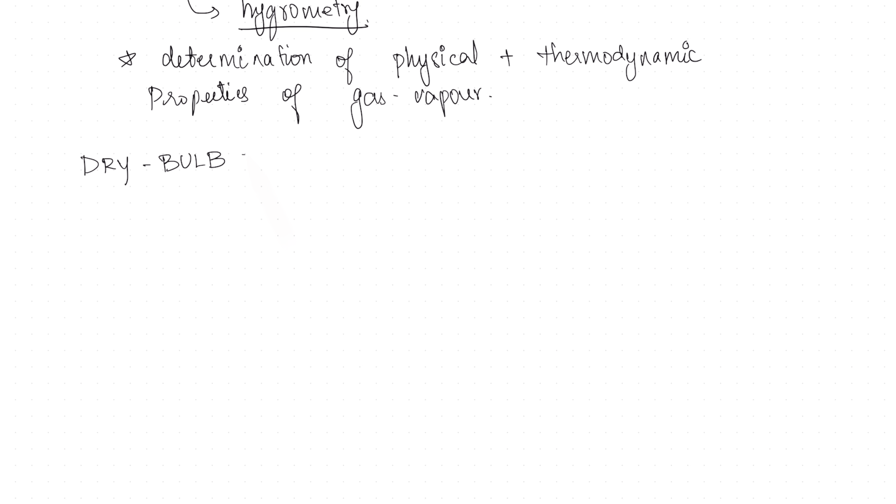Let's start with the terms usually dealt with in hygrometry. The first term is dry bulb temperature. So dry bulb temperature, or just temperature, or air temperature, it all refers to dry bulb temperature. Even if they say just temperature or air temperature, it all means dry bulb temperature.

This is the temperature of air measured in a place that is shielded from direct solar radiation. So no other fancy definitions attached to it. It's as simple as your air temperature.

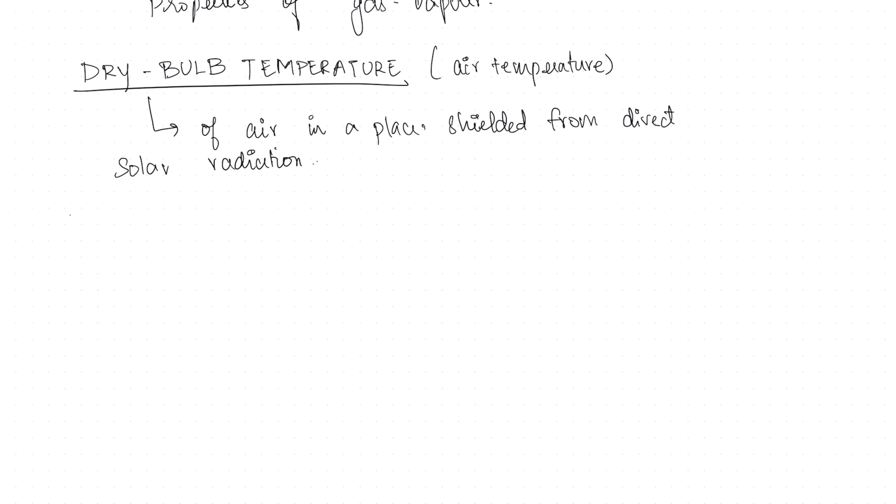Now let's move on to wet bulb temperature. Your wet bulb temperature basically indicates the cooling effect due to evaporation. Now what does that mean? Let me explain. How it is usually measured is, this is your thermometer and the bulb of it is usually covered with a wet cloth or a wick.

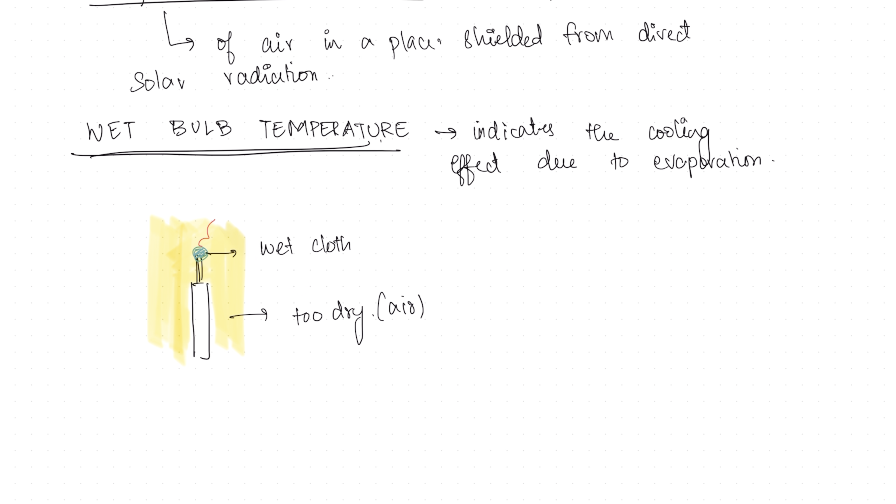Now imagine the air around it. The air around it is too dry. So what does it do if it's too dry? It takes up the water vapor from this wet cloth by evaporation and takes it into the air. So what will happen? The temperature here would become lesser.

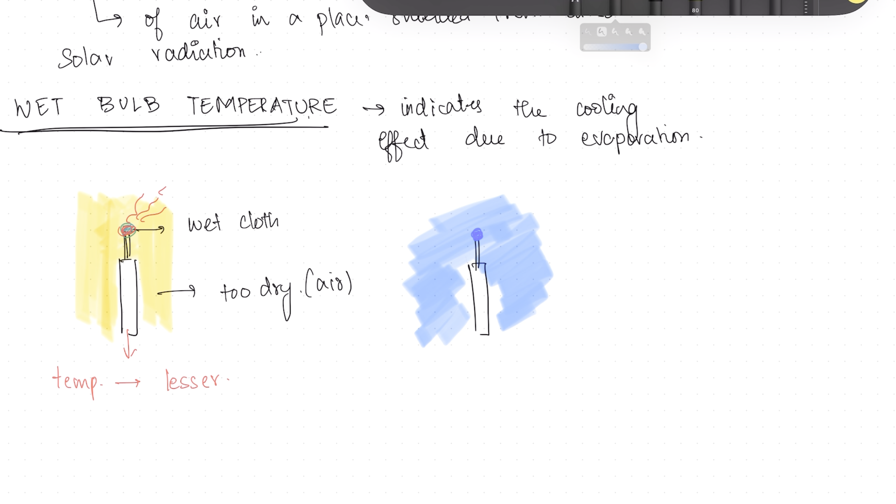Now imagine the same scenario, your thermometer covered with wet wick, but here the air is too humid, which means it has enough moisture content. So it has some amount of moisture in it. So what does it do? It takes very little amount of water from the cloth by evaporation. So here the temperature would be comparatively higher.

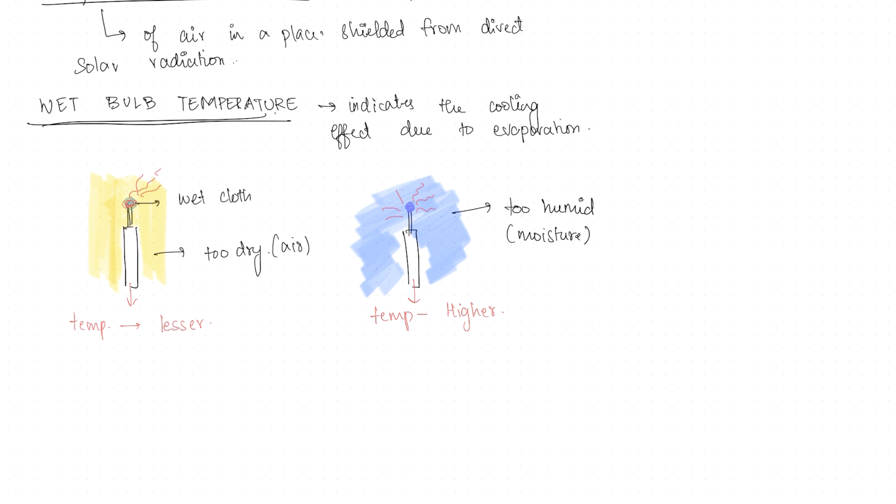Now imagine, no, before that - whatever temperature, higher or lower, I'm talking about, would always be lesser than the dry bulb temperature. So your wet bulb temperature would always be less than your dry bulb temperature. So let's consider what this means.

Imagine the air temperature, or your dry bulb temperature, to be 30 degrees Celsius in both accounts. And since the air is too dry, it takes up a lot of water. Then the temperature you would find is, let's say, 25 degrees Celsius.

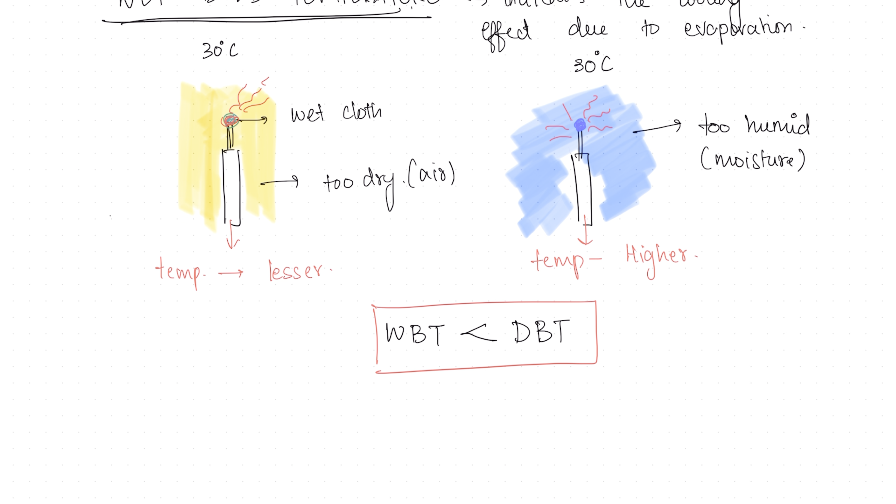And since there is already some amount of moisture in the air because it's already humid, it takes very little amount of water due to evaporation. So the temperature is comparatively higher - let's say here it is 28 degrees Celsius. Any which way, the temperature is less than dry bulb temperature. But if you compare both, this would be higher compared to your dry air. So that is what I am talking about.

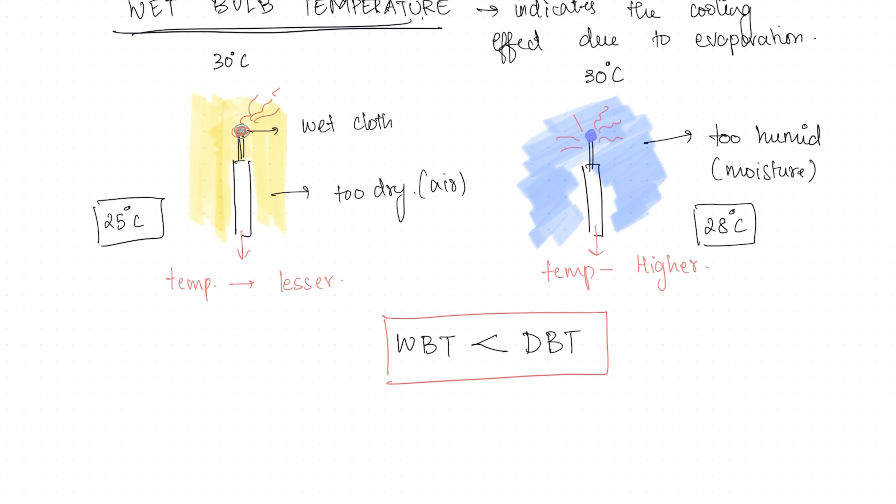Now imagine a third case scenario where the air here is 100% saturated, which means it does not have any space to take up any more water vapor. In that scenario, your wet bulb temperature would be equal to your dry bulb temperature. Okay, I hope this is clear.

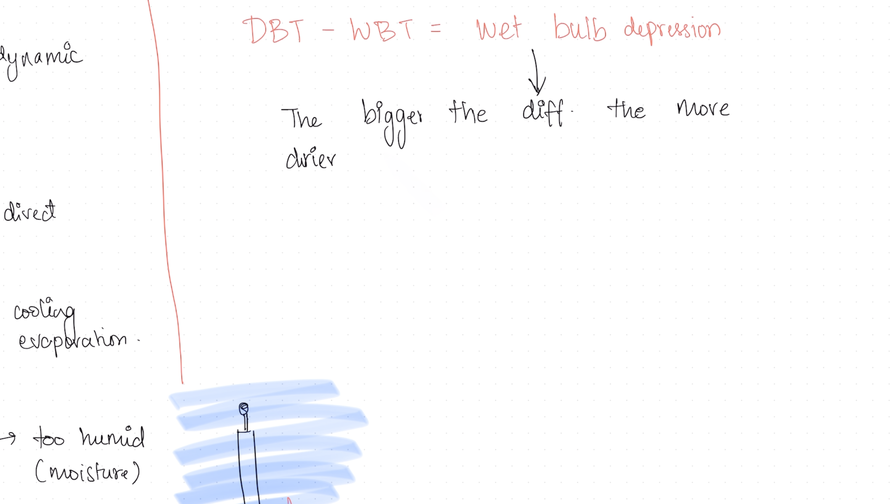Let's move on to the next parameters. Now, your dry bulb temperature minus your wet bulb temperature gives something called the wet bulb depression. And the bigger the difference, the more dry the air; the smaller the difference, the more humid the air.

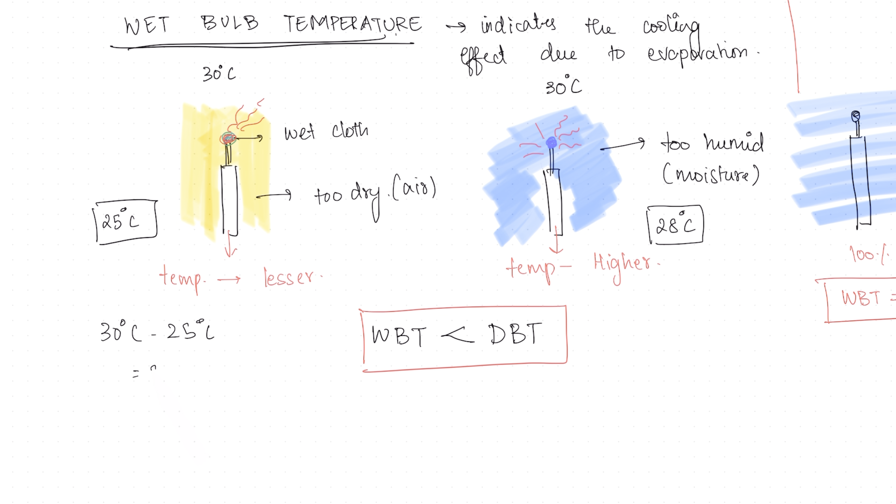Now what does this mean? Let's again go back to the same example. Here, the dry bulb temperature is 30 degrees Celsius, your wet bulb temperature is 25 degrees Celsius, so your wet bulb depression would be 5 degrees Celsius. And here it would be 30 minus 28, which is 2 degrees Celsius. So the more dry the air, the bigger the difference; the more humid the air, the lesser the difference. So I hope it's clear.

Now let's move on to dew point temperature.

Dew point temperature is basically the temperature at which the air or water vapor condenses into dew. This is the temperature at which water vapor turns into dew, and this is the process of condensation, which is basically the process by which we get rainfall. Your dew point temperature is always less than your wet bulb temperature, which is always less than your dry bulb temperature.

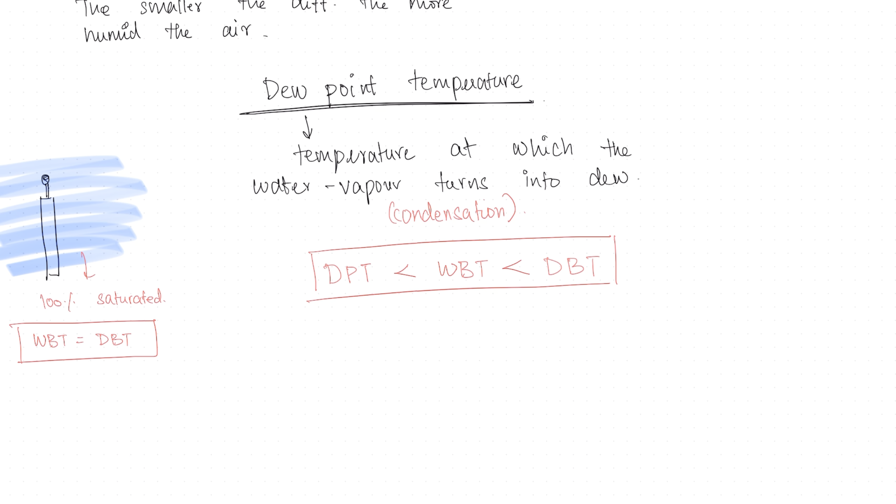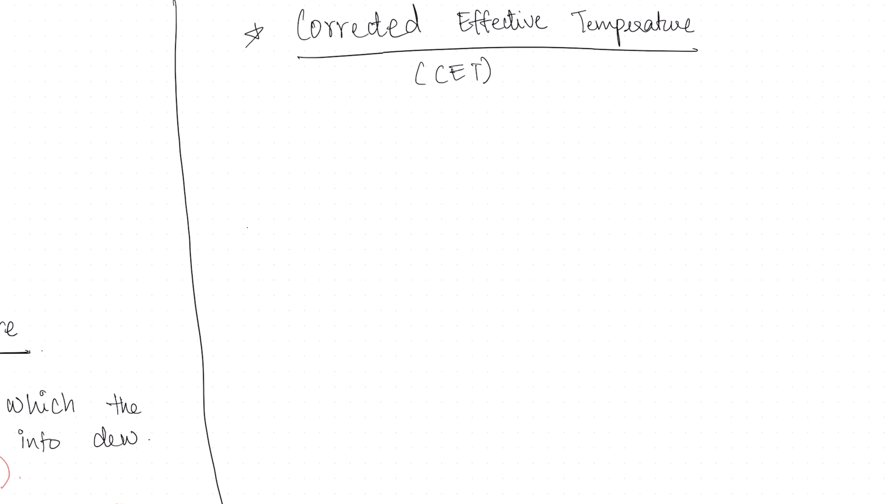Now let's move on to another parameter, which is corrected effective temperature, or CET. What does this mean? I'll start with a demonstration. Imagine this is a room and you're standing in it. The general air here is your air temperature, which is your dry bulb temperature.

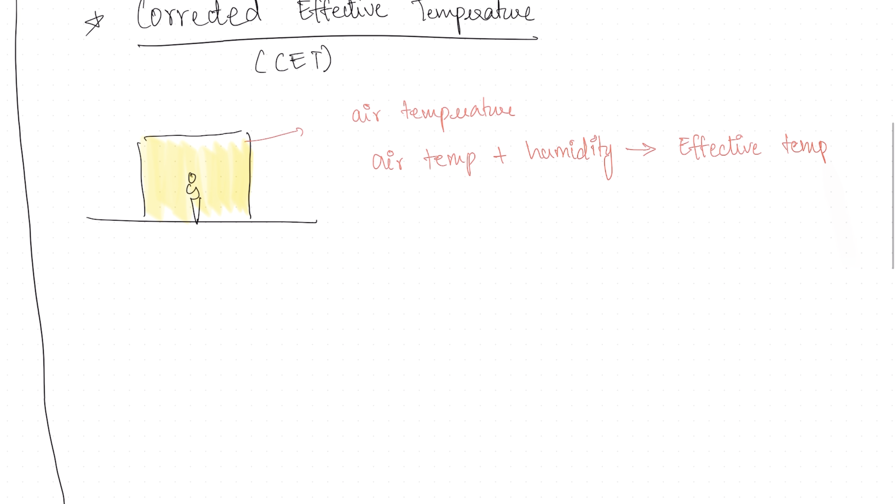Now imagine the air is humid. So your air temperature plus it's humid, the air has humidity. When you add these two, you get something called the effective temperature. What does that mean? Imagine you measure the air temperature in the room and it feels like 30 degrees Celsius. But then the air is very humid, and you add humidity to it. It doesn't feel like 30 degrees Celsius anymore, it feels a bit more than that - let's say it feels like 32 degrees Celsius. These are just examples I'm using, keep that in mind.

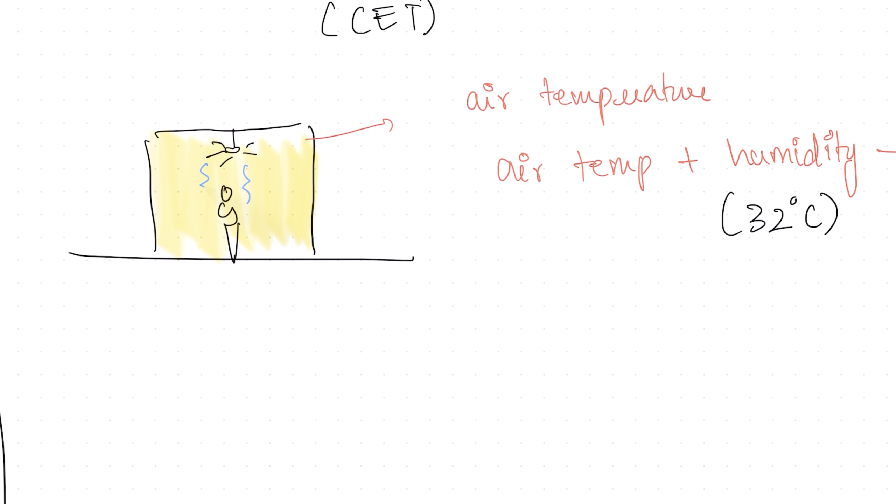Now imagine you are adding a fan to it, which means you're giving air movement. All this air is coming over you and you feel okay. With the inclusion of air movement, you feel okay at maybe 30 degrees Celsius, or let's even say 28 degrees Celsius. Now imagine all the walls around it are hot, or give off radiation from heat - this gives you radiation heat from your surroundings. With all that, the temperature that you feel is at 29 degrees Celsius.

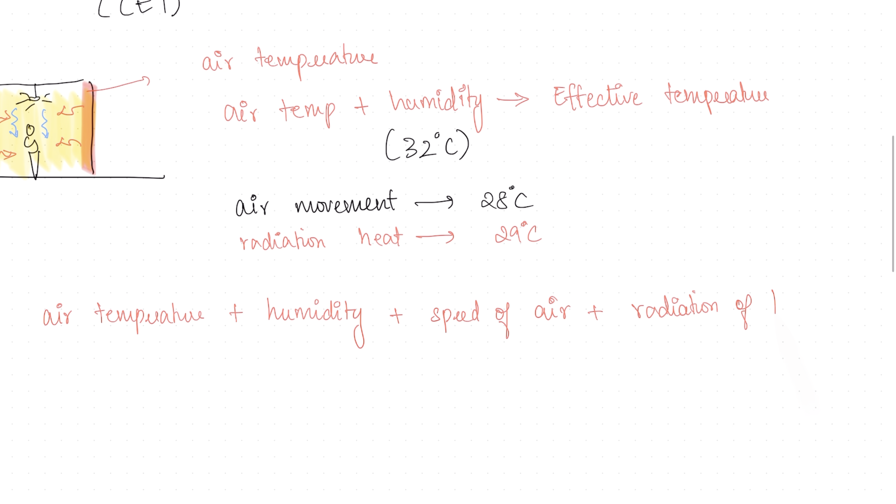So corrected effective temperature is the temperature that includes your air temperature, your humidity, your speed of air, and your radiation heat. All these parameters combined give you corrected effective temperature.

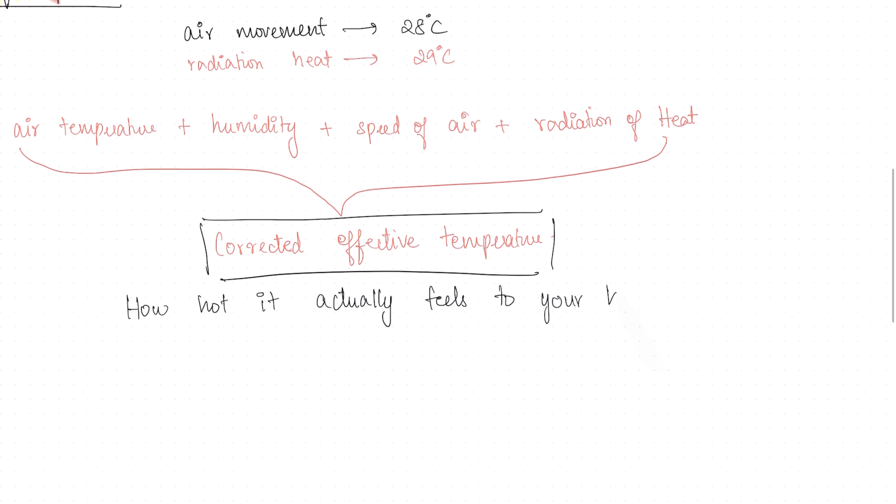What does this mean? This basically means how hot it actually feels to your body in real space. The parameters that it considers for this corrected effective temperature are air temperature, humidity, speed of air, and radiation heat.

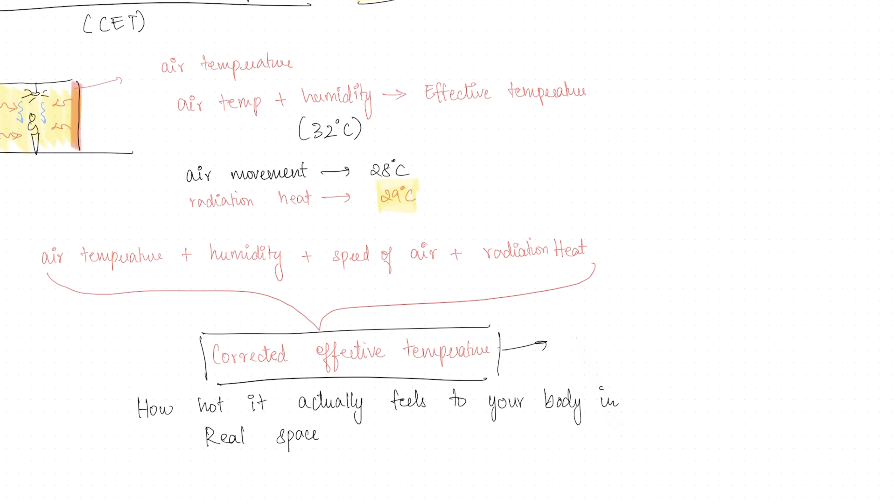Now again, let's look at this. Here we considered our air temperature to be 30 degrees Celsius, but by taking into account all these factors, you feel like it's 29 degrees Celsius, which means your corrected effective temperature is 29 degrees Celsius. I hope this is clear.

So let's move on to humidity. Humidity is the moisture content in your air, and there are different categories under it. Let's look into each one by one. Imagine there's a box, and this box is filled with air. What is air made of? Air is made up of your dry air plus water vapor, and this gives you your moist air.

The amount of water vapor present compared to the amount of volume of air is your absolute humidity. Absolute humidity is the amount of water vapor in the box to the volume of air in it. That is your absolute humidity. It can be defined as absolute humidity equals mass of water vapor to the volume of air. Absolute humidity is also called water vapor density.

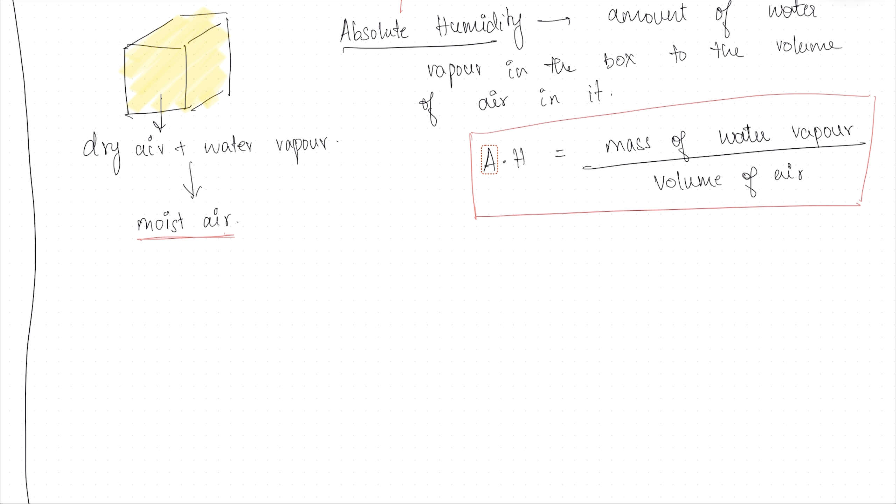Now let's talk about moist air. In this moist air, how much water vapor is present? The moist air consists of your dry air and your water vapor. So what amount of water vapor is present in a moist air? That gives you your specific humidity - basically how much water vapor is present in the moist air. And the formula is mass of water vapor by mass of moist air gives you your specific humidity.

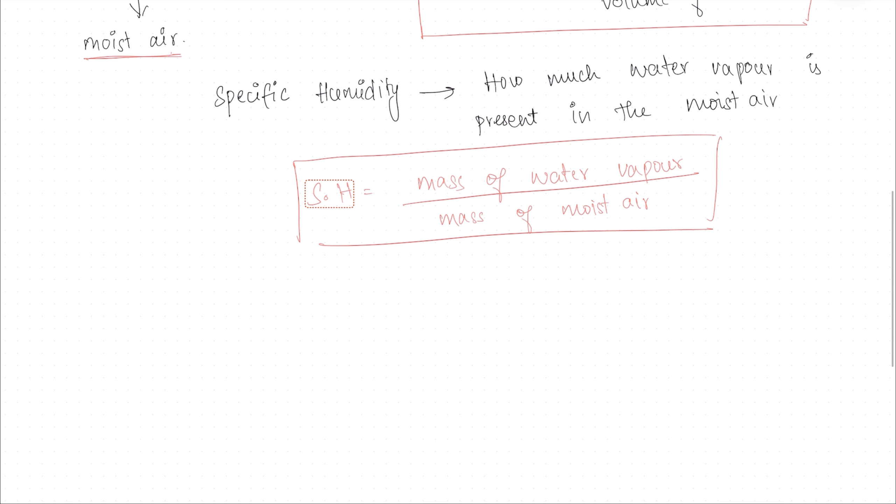And if you compare the water vapor to the dry air, that gives you your humidity ratio. So humidity ratio is, if you compare the water vapor to the amount of dry air.

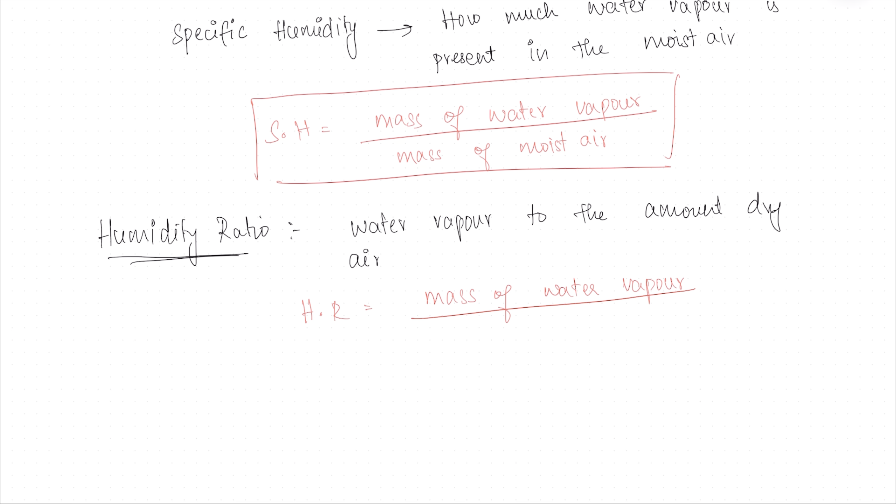Humidity ratio is equal to... okay, I hope it's clear up to now.

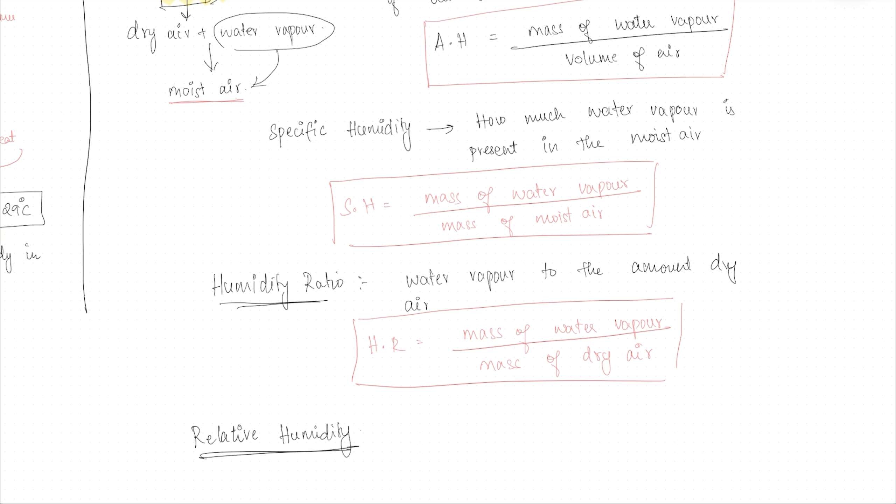Then there is the term relative humidity. So what does this mean? This means the amount of water vapor present in the moist air to the maximum amount of water vapor the air can hold. So it's a ratio, the ratio of amount of water vapor present in the air to the maximum amount of water vapor the air can hold, and it's expressed in percentage. This maximum amount of water vapor is basically your saturation point.

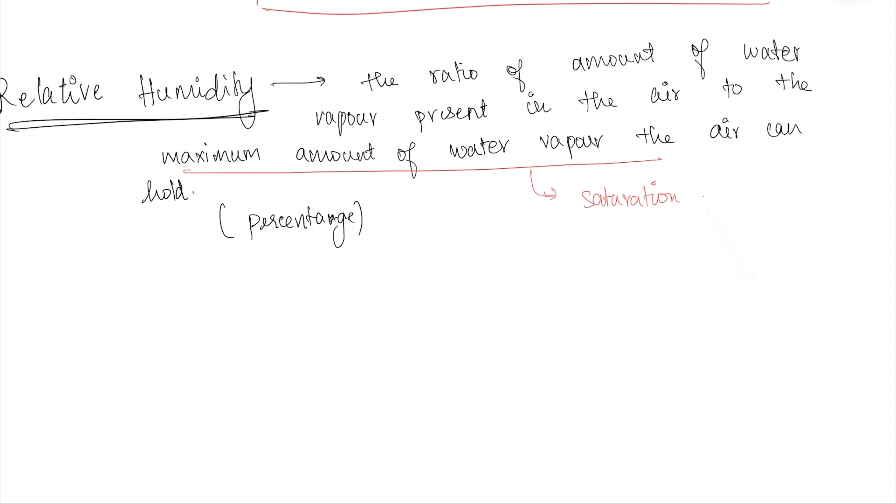So relative humidity is actual vapor pressure to saturation vapor pressure into 100.

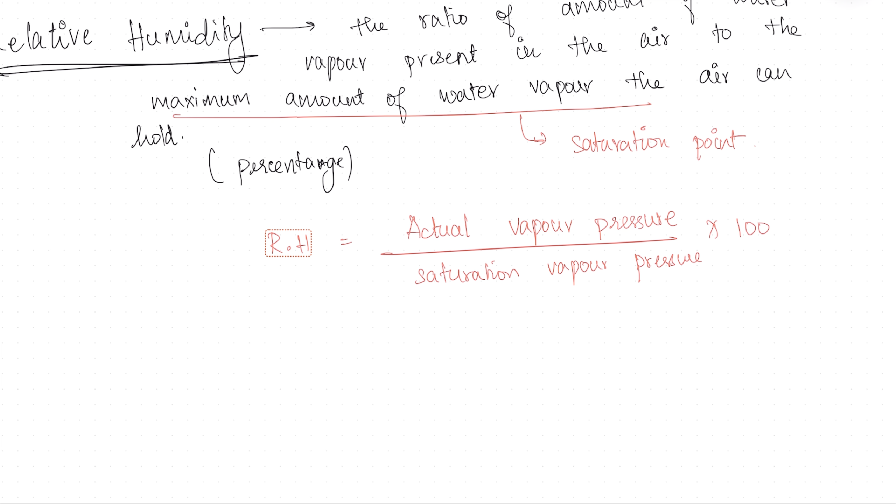So let's talk about humidity once more and try to understand it. Absolute humidity: imagine there's a box and it has air in it. The air is a combination of your dry air and your water vapor, which gives you the moist air. So the amount of water vapor to the volume of air present inside that box gives you the absolute humidity. So absolute humidity is equal to mass of water vapor by volume of air.

Now the amount of water vapor present in the moist air gives you specific humidity. So how much water is present in the moist air, which means mass of water vapor by mass of moist air. Humidity ratio is the amount of water vapor present in the dry air, so mass of water vapor by mass of dry air.

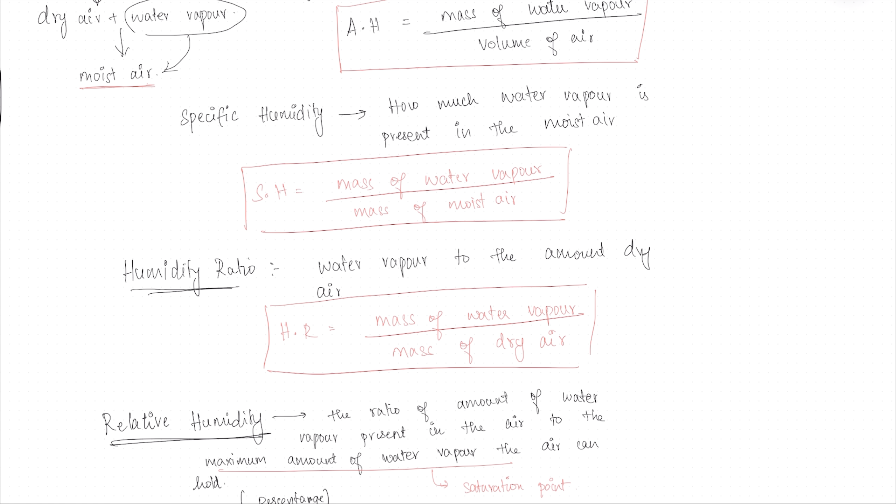Then relative humidity is the ratio of amount of water vapor present in the air to the maximum amount it can hold. So actual vapor pressure by saturation vapor pressure into 100, this 100 because it's expressed in percentage. So I hope humidity is clear now. And if you are getting confused between absolute humidity and specific humidity, thinking like volume of air and mass of moist air is the same, then no, volume is different from mass.

Now let's move on to our next terms, which is specific enthalpy and specific volume.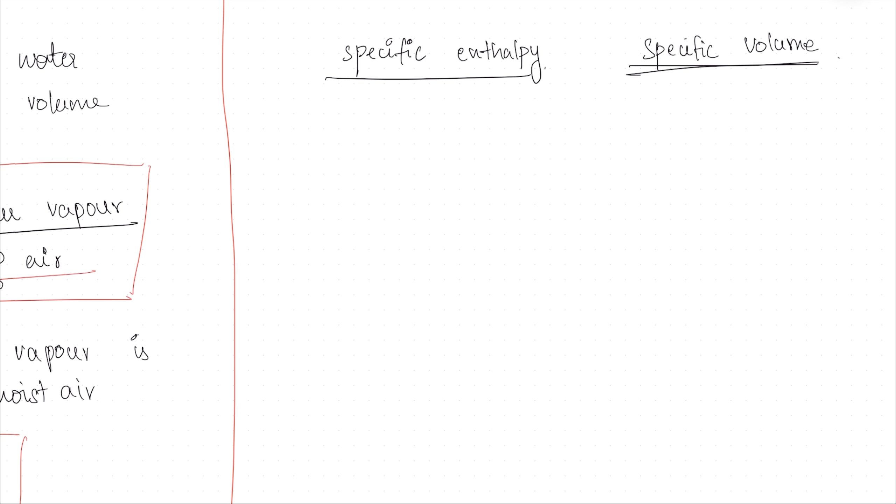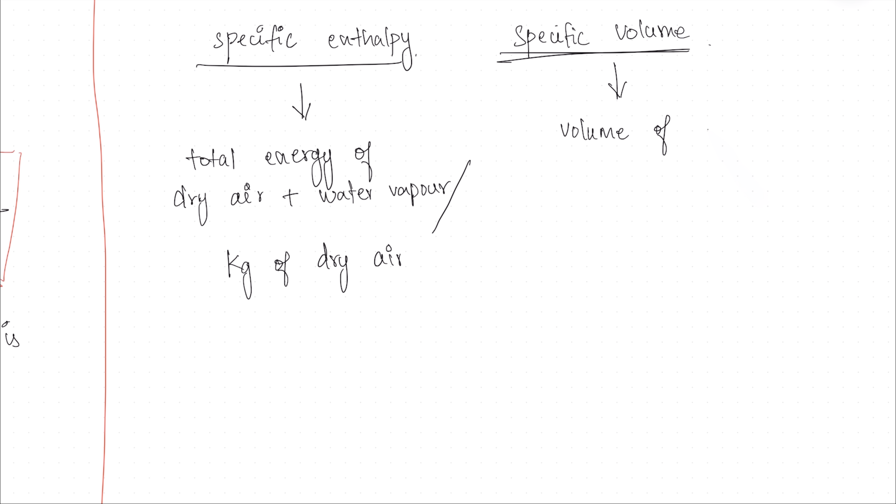So specific enthalpy is the total energy of both the dry air plus water vapor per kilogram of dry air, and specific volume is the volume of both the dry air plus water vapor per kilogram of dry air.

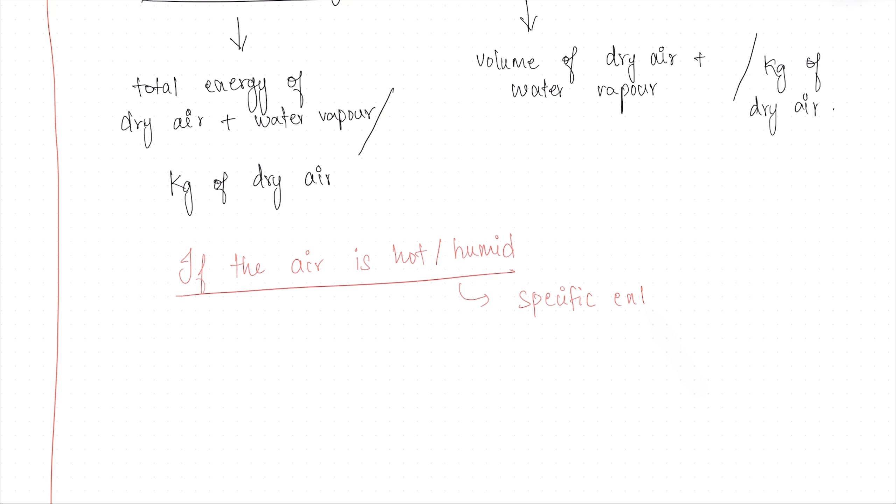And if the air is hot or humid, it expands and it requires a lot more energy. So both your specific enthalpy and your specific volume, they both increase.

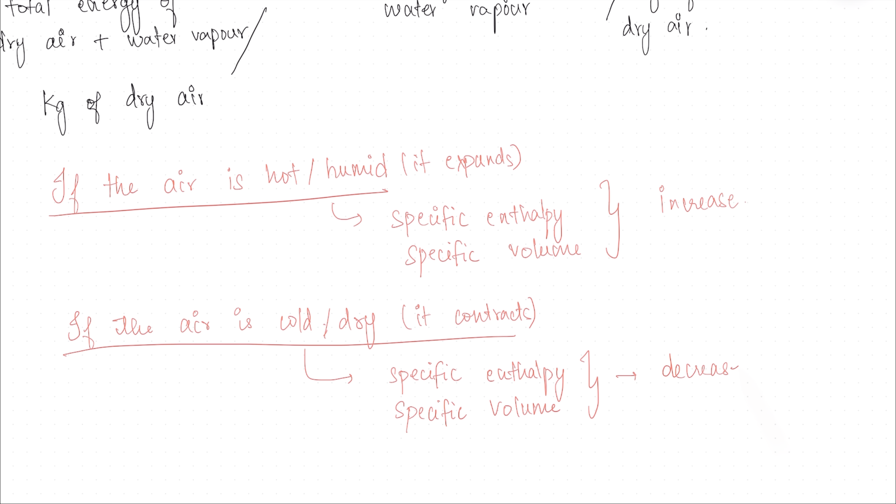Let's move on to the next topic, which is your psychrometric ratio. So the psychrometric ratio formula is R.

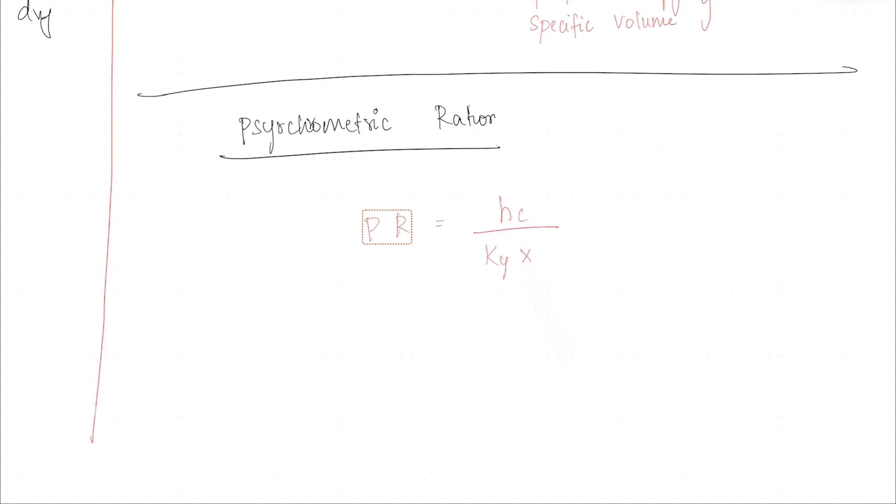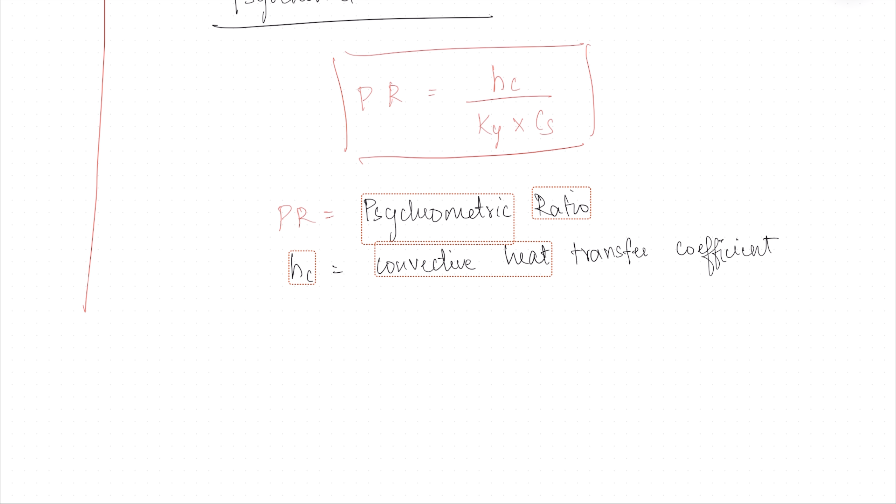Now let me explain each term. This is your psychrometric ratio. Hc is the convective heat transfer coefficient. So what is convective? Convective is a type of heat transmission. Convection basically is the transfer of heat through liquid forms like gases or water, like that.

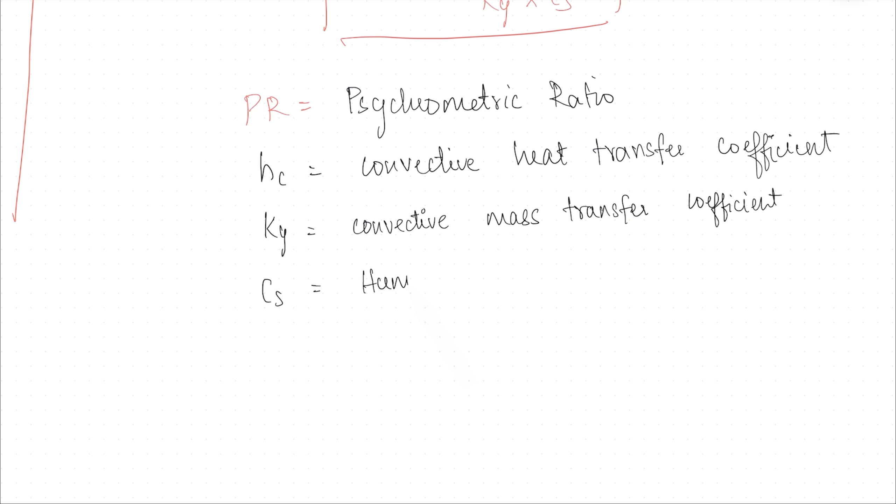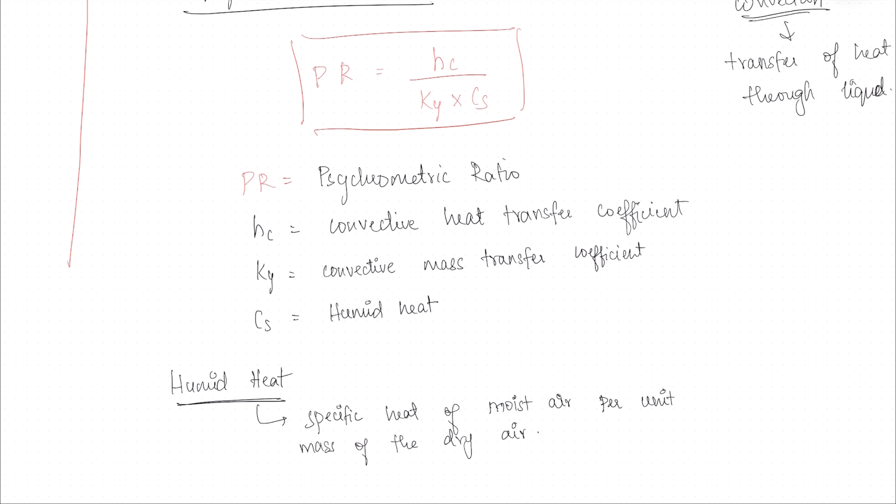Then Ky is your convective mass transfer coefficient, and Cs is your humid heat. So what is humid heat? Humid heat is the specific heat of moist air per unit mass of the dry air. So psychrometric ratio is the ratio of convective heat transfer to the product of convective mass transfer and humid heat. I hope this formula is clear.

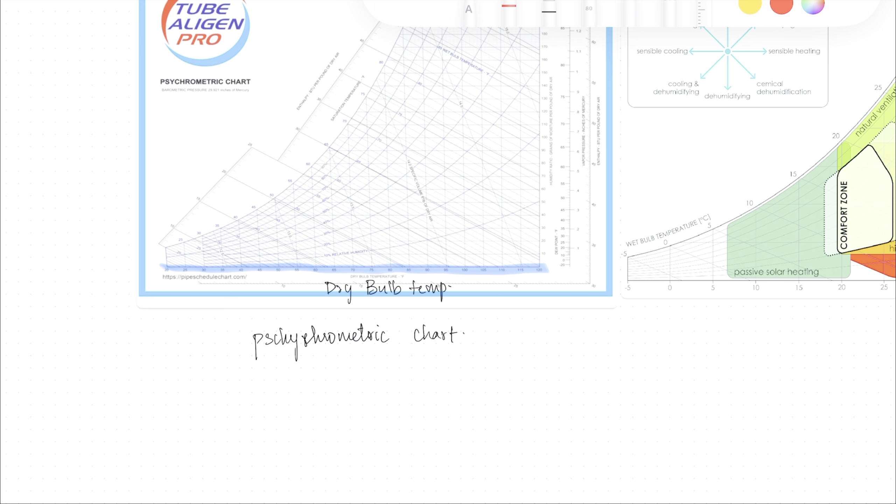And everything that's marked on this line is your wet bulb temperature or your saturation temperature. So these are your wet bulb - I meant all the marks here, okay? So the temperatures that are marked here.

And all these curves, these curves that go simultaneously, all these curves are your relative humidity.

And all the points that are marked here is your enthalpy.

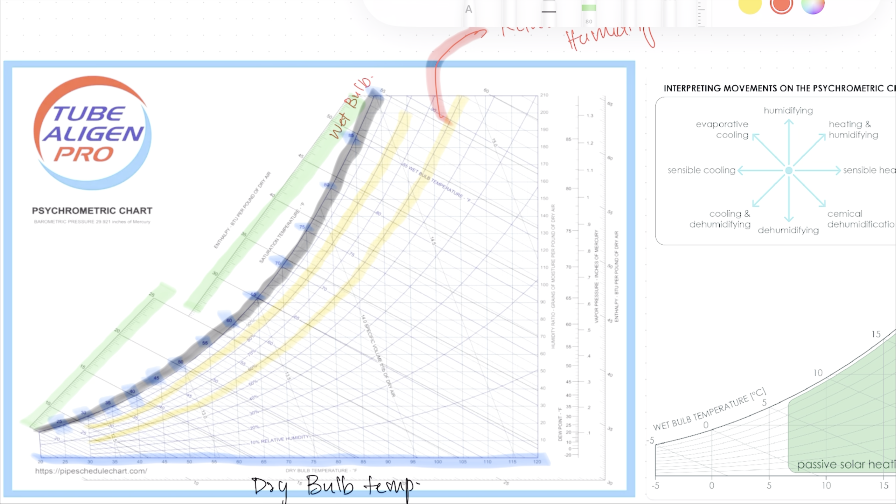And the almost vertical lines, these form your specific volume. These are your specific volume.

And that's mentioned here on the y-axis is your humidity ratio. So let me explain this again.

Let me draw here separately and I'll explain it. So, these two are your axis, okay?

And whatever that's mentioned here is your dry bulb temperature, DBT. It increases as it moves this way and decreases as it moves this way. So let's just say here 20, 30, 40, and so on, then 60, 70, 80 and so on.

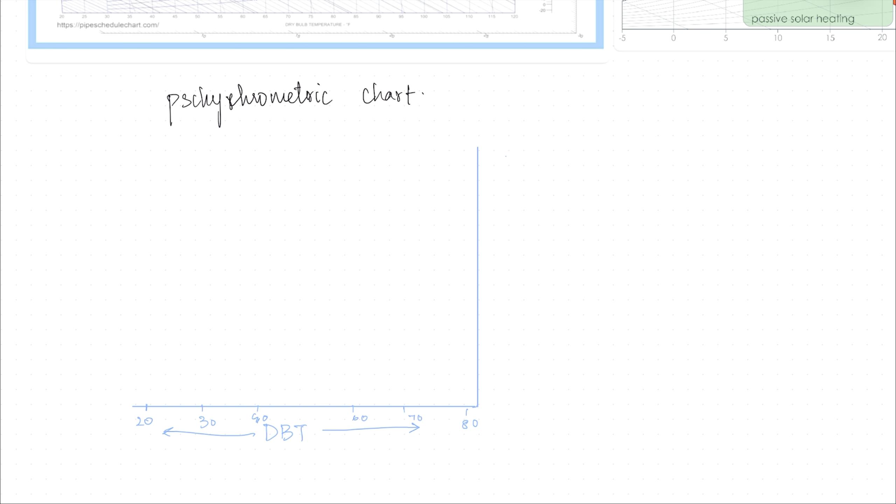And whatever is marked here is your humidity ratio, usually called grains. So it's marked here, say 0.01, 0.08, 0.07, and so on. It's the same - increases as it moves up, decreases as it moves down.

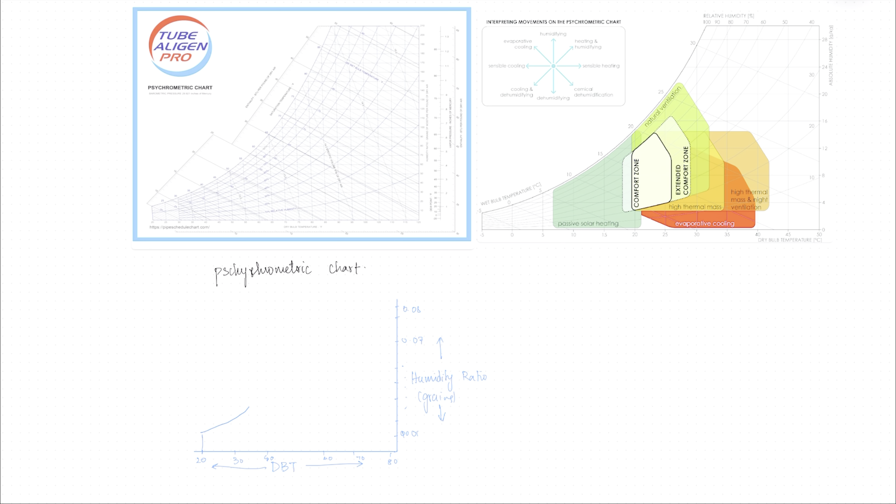Then you have this curve. Okay, this is your curve, and any point marked here - all these points are your wet bulb temperature. It's also called your saturation temperature - the curve itself is called the saturation temperature.

And your wet bulb temperature basically goes crossways, so it goes like this. These lines are your wet bulb temperature.

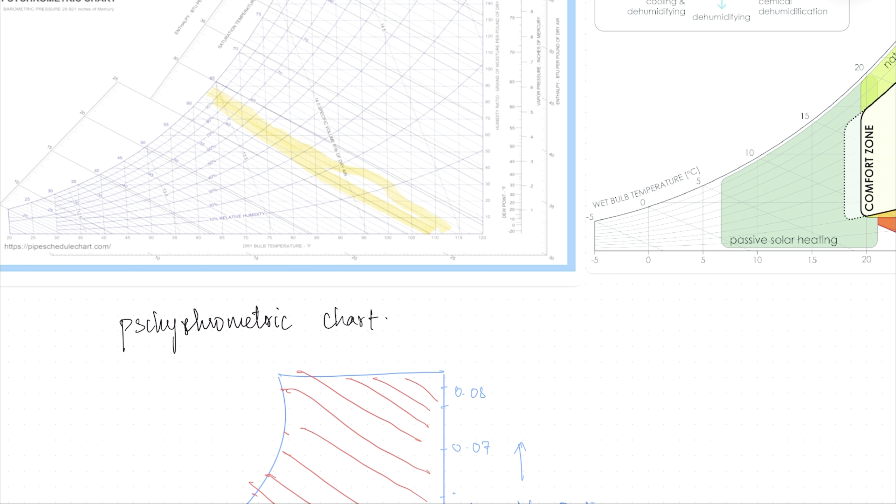Now, projecting from here are your enthalpy lines. So these are your enthalpy.

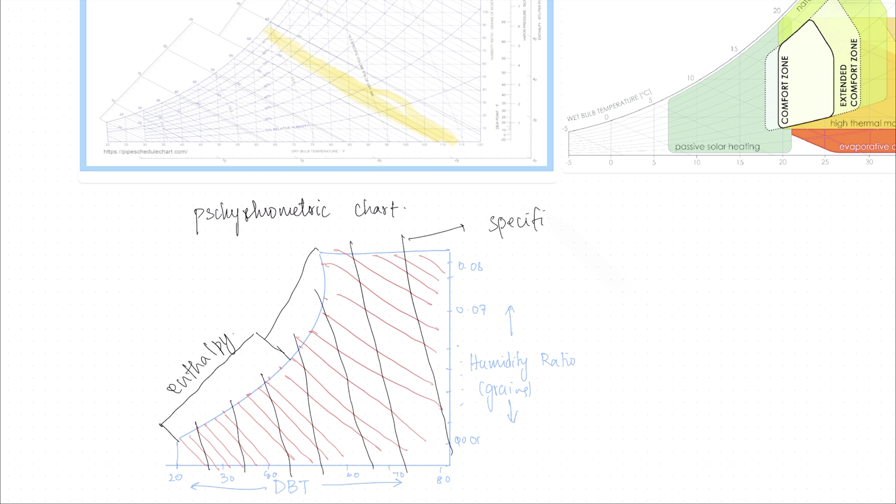And your almost vertical lines - not fully vertical, but almost vertical - that go this way, they are your specific volume. So again, let me mark them - these lines are your specific volume.

Now the dry bulb temperature is not just marked in this region - the line also goes up. So all the vertical lines that you see are your dry bulb temperature.

And the curves that go along these lines - these curves are your relative humidity. Okay, let's mark again: these curves are your relative humidity.

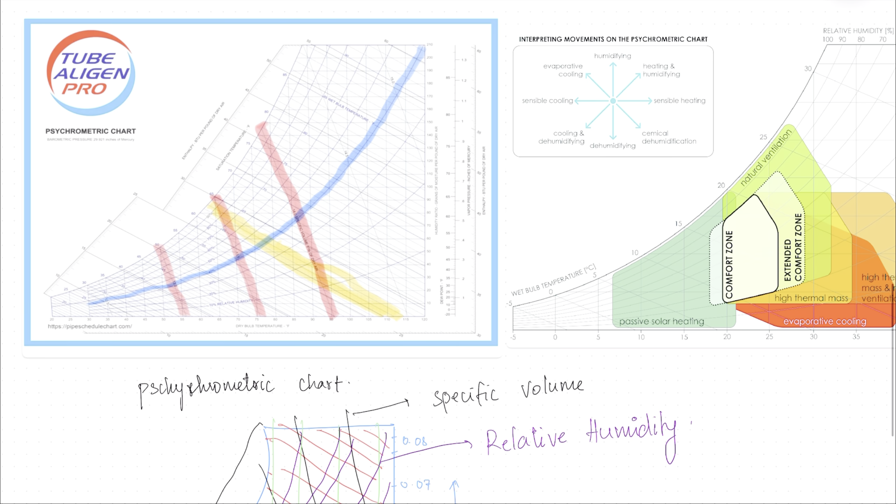And the line that goes from the humidity ratio and intersects the wet bulb temperature curve - the point that it makes, that point where it intersects, gives you your dew point temperature. Okay, so I hope this is clear.

So let's consider it now with an example. Let us consider a temperature of say 70 degrees Fahrenheit - this is the point, the line that goes here. And the wet bulb temperature is, let's say, 65 degrees. So these diagonal lines are your wet bulb temperature.

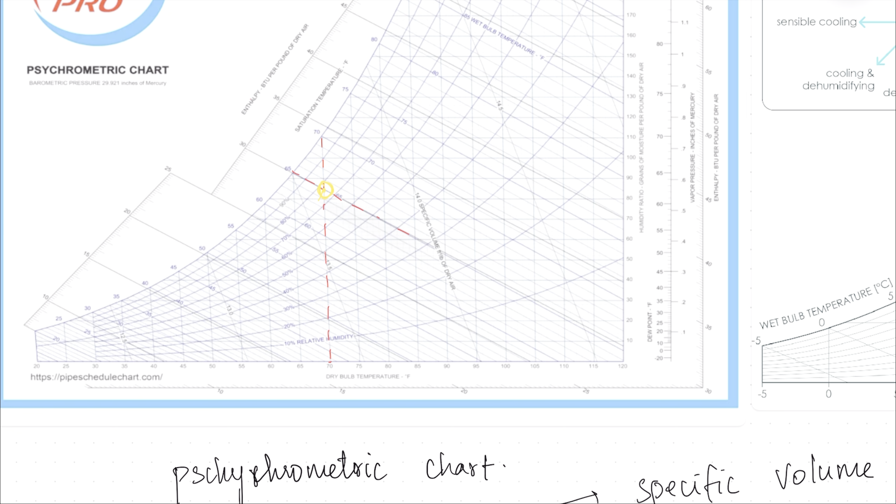Now the point that this intersects, and the curve that goes parallel to the relative humidity curves, gives you - with the dry bulb temperature and the wet bulb temperature, you can find the relative humidity. This is not very visible, but okay, that's relative humidity.

Now what do you do? You take this point - the point of intersection of the dry bulb temperature and wet bulb temperature, which gives you your relative humidity - and you join it with the humidity ratio, then extend it, which gives you this intersection point. Now this is between 60 and 65, leaning more towards the 60s range, so let's consider this 62 degrees Fahrenheit. So this is your dew point temperature.

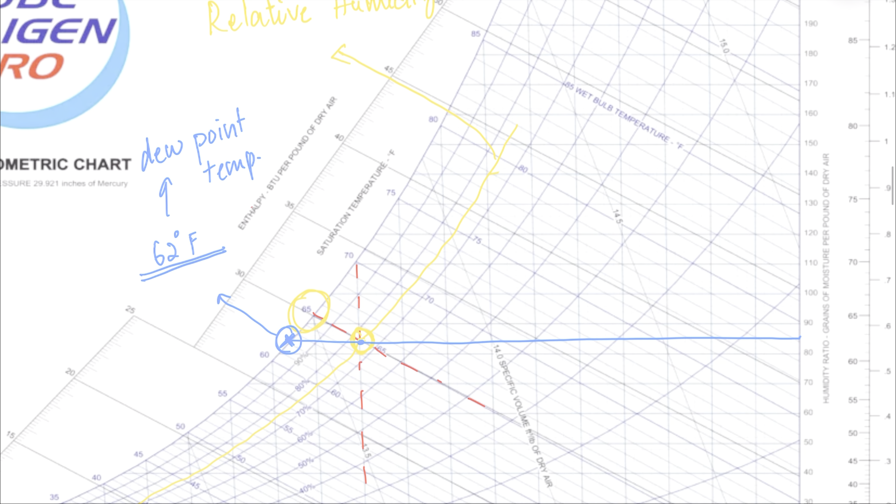So I hope this is clear, and let's move on to the strategies that can be done using the psychrometric chart. So these are the psychrometric chart strategies - it's mostly self-explanatory, but let me talk about it.

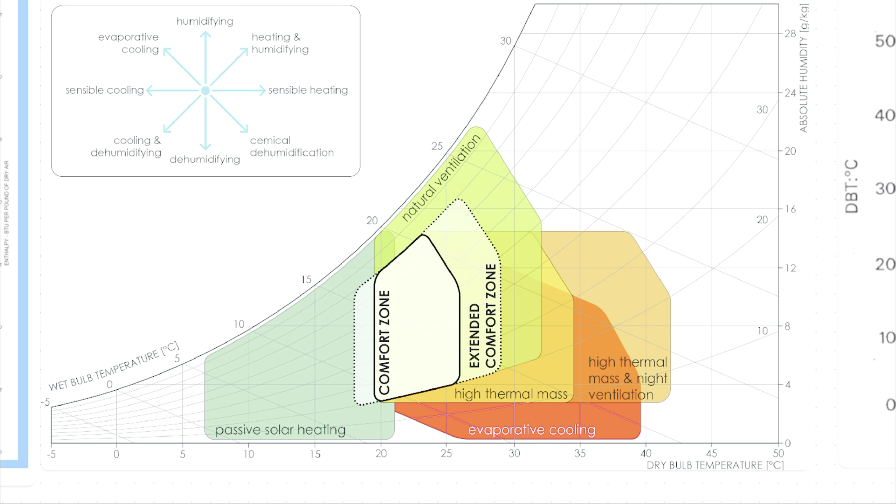So the way we plot our dry bulb temperature and find all the related issues that I talked about in this map - after plotting it, you can divide it into zones. Whatever falls within this zone is your comfort zone, and these are your extended comfort zone. So up to these regions we have no issues, it's all good, it's all fine.

Once it stretches into these regions, then we need to think about giving a lot of natural ventilation. Then if it reaches these regions, a lot of passive solar heating is required - just look at the temperature here, it's only 10 degrees Celsius, so you would need a lot of heating to feel comfortable in that environment.

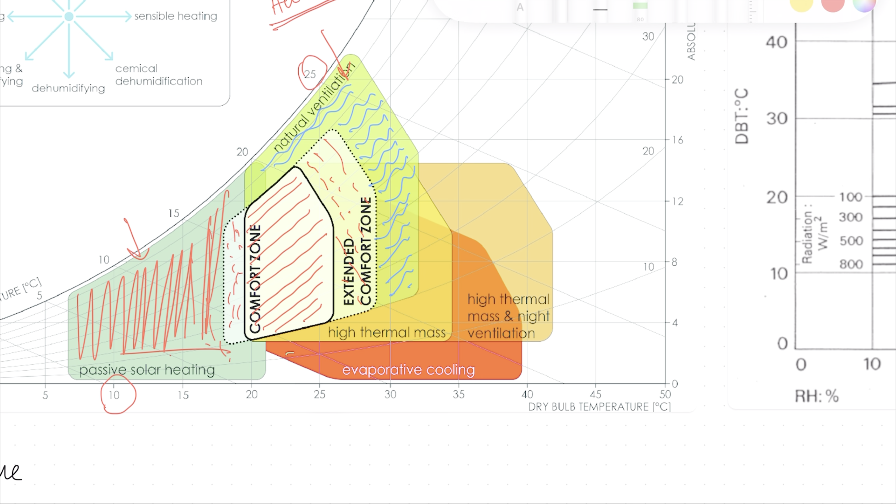So these are based on what kind of strategies need to be done - here you need a lot of passive solar heating. This temperature, like 25 degrees Celsius, isn't too bad, it's fine, but maybe the humidity is more, so you need to give a lot of natural ventilation. Then, in these regions, a lot of evaporative cooling needs to take place.

Then you have regions where a lot of high thermal mass materials, like thick walls, and other passive design strategies need to be used. In these regions, not just high thermal mass but also night ventilation needs to be taken care of. So these are the ventilation and design strategies that can be done using the psychrometric chart.

So I hope the psychrometric chart is clear now, and let's move on to other topics.

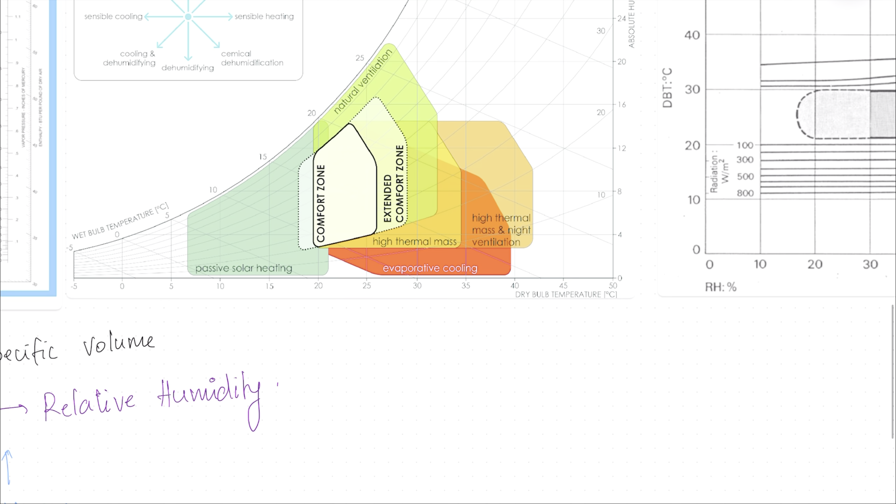So we have something called comfort ventilation, which is basically the ventilation that is comfortable enough for you in an environment.

So sometimes a building—let's say this is your building, and this is your direction of wind—the building need not always be 90 degrees perpendicular to the direction of wind. It can be, but it is not necessary. A convenient angle can be anywhere between 0 to 30 degrees.

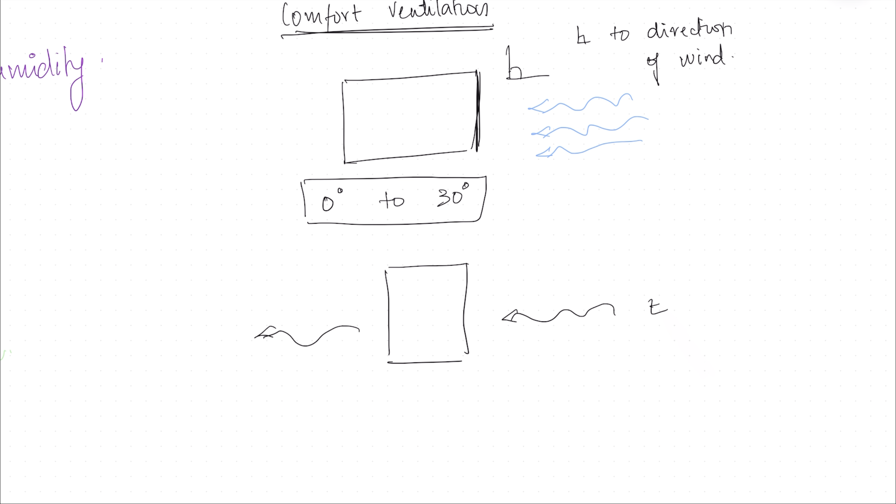For example, let us say this is your building and your wind direction is east to west. East to west is not the ideal orientation due to radiation and heat gain. So what you can do is orient your building at say 30 degrees, and you can still get a good amount of ventilation.

Okay, I hope this is clear. Now let's move on to the next point. For proper ventilation, the ratio of opening area to the total floor area of the room should be 1:6. This is the ideal ratio that is followed.

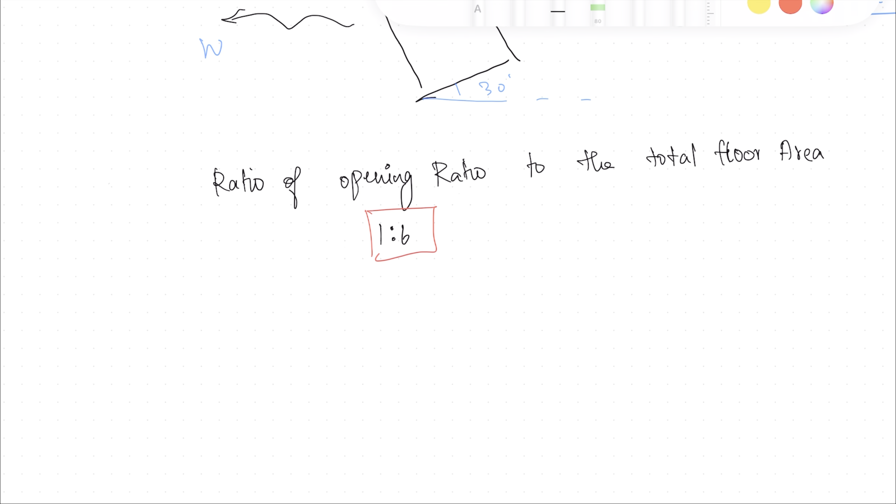Now let us look into terms with formulas, like air changes per hour. What does this mean? This means the number of times the air in your room, say, is changed completely in 1 hour. So that's what air changes per hour means, and you have formulas for this.

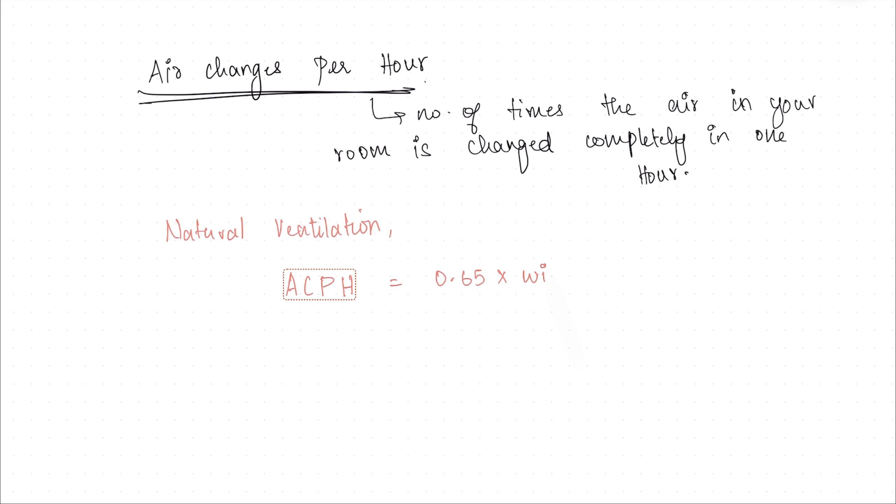If we take natural ventilation, then the air changes per hour is equal to 0.65 into wind speed into area of the smallest opening into 3600, divided by volume of the room. Okay, this is for natural ventilation.

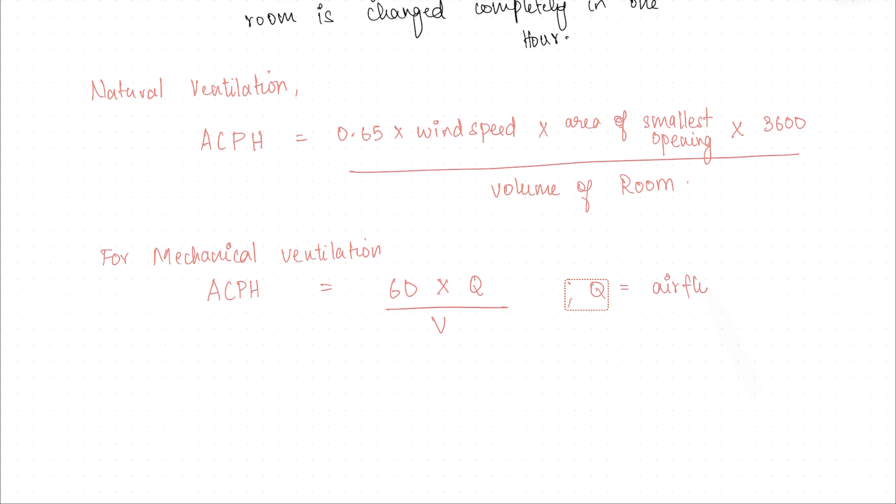And if you see for mechanical ventilation, it is equal to 60 into Q by V, where Q is your airflow rate. Okay, so these are the two formulas for air changes per hour.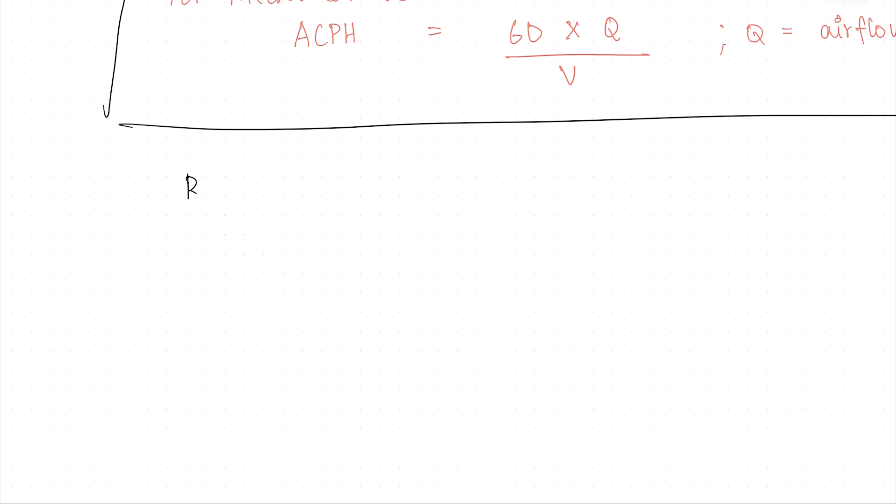Now the rate of air change depends on certain factors. Let's see what all those are.

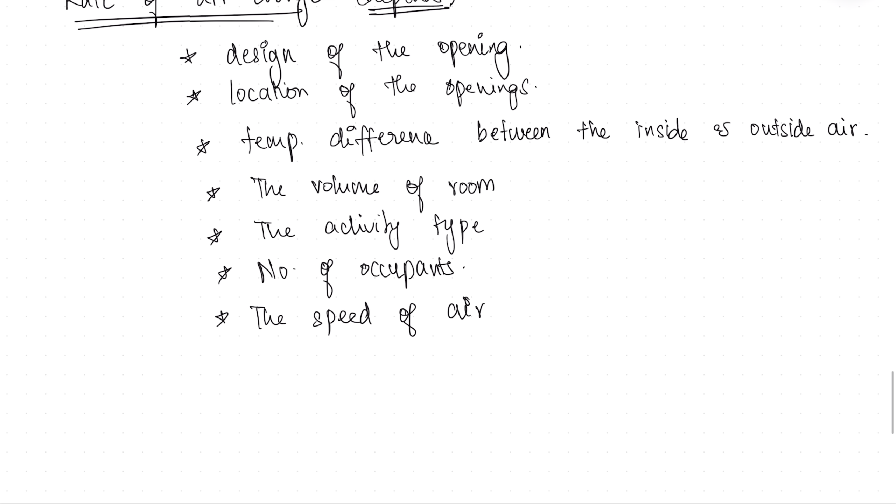So first is the design of the opening, the location of the opening, the temperature difference between the inside and outside air, the volume of the room, the type of activity that takes place in the room, the number of occupants within that room, the speed of air, and also the quantity of heat, moisture, and odor present in the room.

These are very practical things that we already know about, so there is no need for much explanation here. So what are the factors that the rate of change of air depends upon? It depends upon the design of the opening, location of the opening, the temperature difference between the inside and outside air, the volume of the room, the kind of activity that takes place in the room, the number of occupants, the speed of air moving into and out of the building, and the quantity of heat, moisture, and odor present in the room.

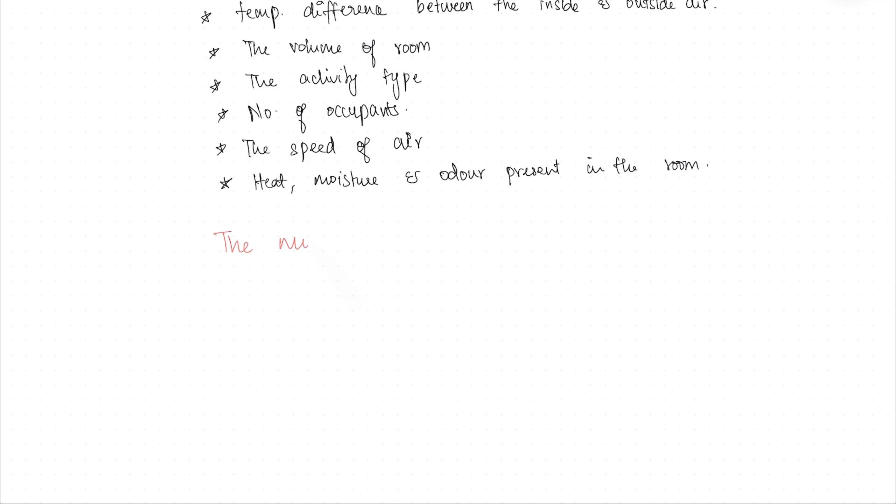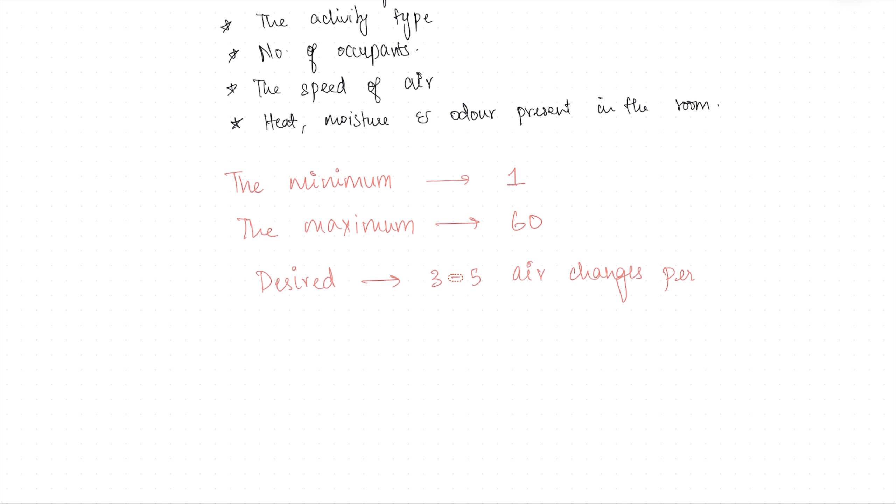Now, the maximum and minimum air changes that can happen: the minimum air changes per hour should be at least 1, and the maximum air changes per hour can be 60, but the desired range is basically somewhere 3 to 5 air changes per hour.

So we've talked about air changes, and now let's move on to heat gain or heat loss.

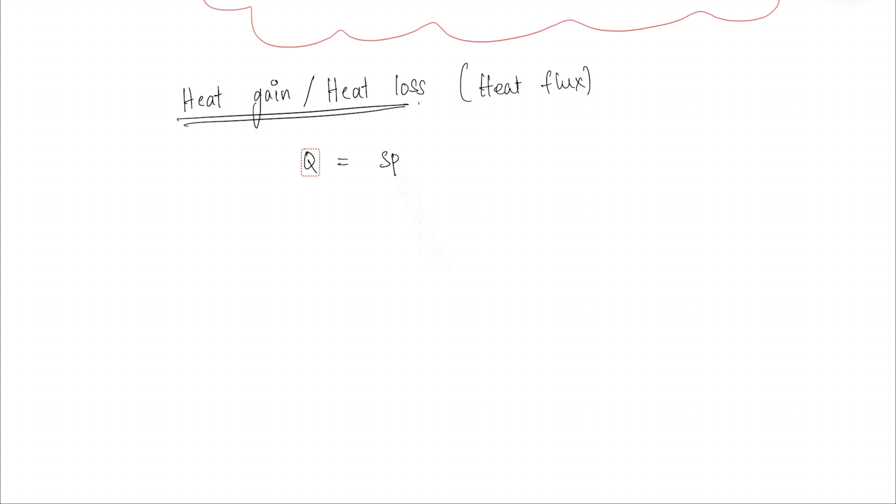I'm just going to talk about the formula here. So heat gain or heat loss, also called heat flux. The formula is Q equals specific volumetric heat of air into V into delta T. Now let's see what each of them is. Q is your heat flux.

Now let's talk about specific volumetric heat of air first. Specific volumetric heat of air is mostly 1300 joules per cubic meter degree Celsius.

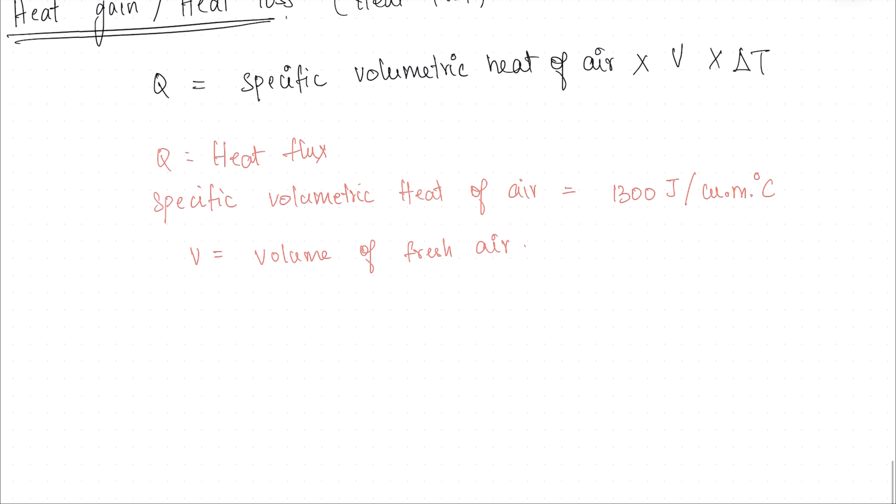And V is the total volume of fresh air. This total volume of fresh air can be found by number of air changes into volume of the room or space, divided by 3600, gives you your volume of fresh air. Volume of fresh air is not the same as volume of the room, so remember that. And delta T is the temperature difference.

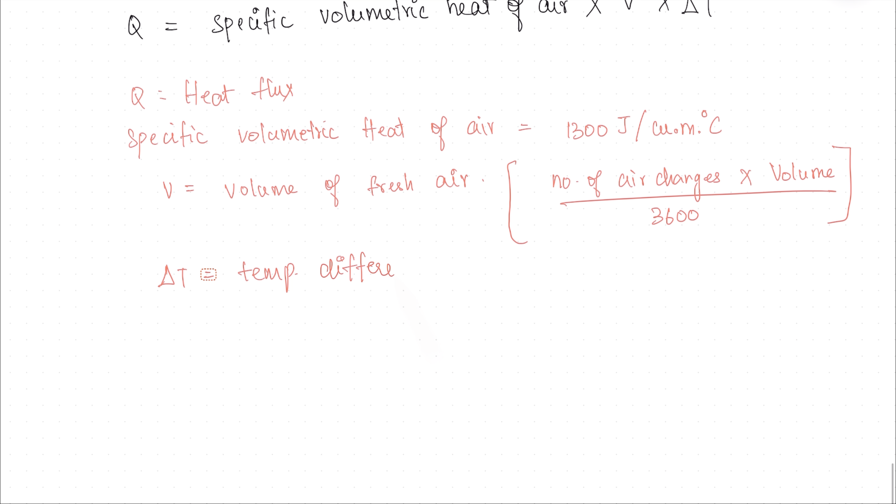So I hope the formula for heat gain or heat loss is clear.

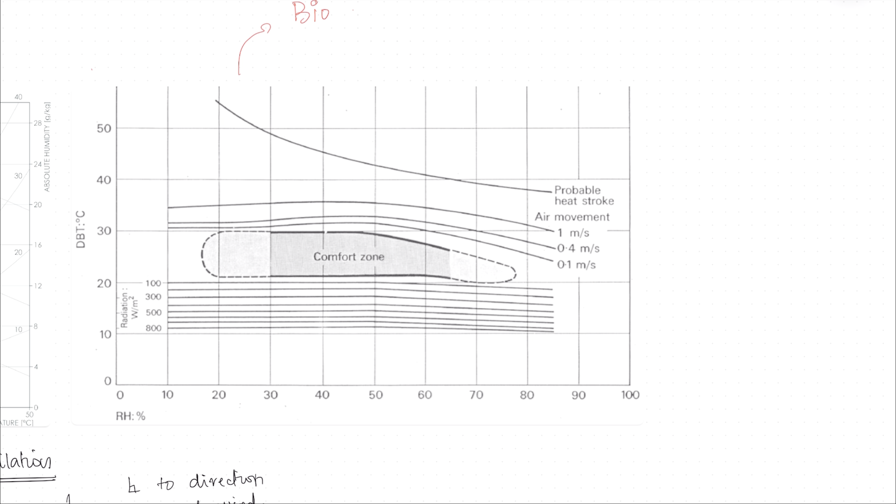Now let's talk about thermal comfort and the parameters that are used there. The first parameter I want to talk about is this bioclimatic chart, by Victor Olgyay. So Victor Olgyay is the one who founded or made the bioclimatic chart.

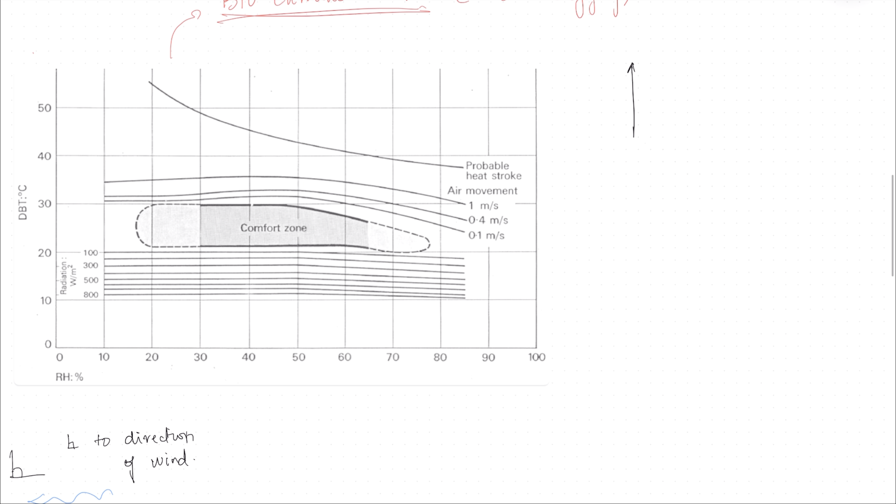Now let's talk about it a bit. The axes are basically: this is your dry bulb temperature and this is your relative humidity, as mentioned here. And this has a comfortable zone in it, so anything that falls into here is your comfortable zone. Anything that falls in the dotted region is acceptable, comfortable to an extent, like an extended comfortable zone, like how we saw in the psychrometric chart. It's the same way here.

And the regions here: anything that falls above the comfort zone but below this line, you need to see what kind of treatment needs to be done. So here a lot of wind is needed. But still you have to provide as much as possible so that anything comes into the comfortable zone. Even if you point your relative humidity along with your dry bulb temperature and it's somewhere here, you need to put an effort to bring it to the comfortable zone. It's the same way.

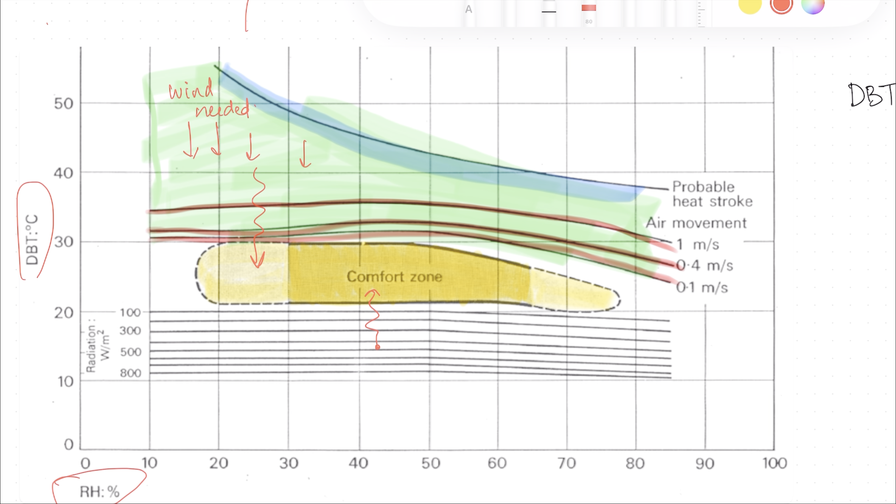Now see these lines. Can you see these lines? Let me explain what they are. Imagine you're plotting, and let's consider your relative humidity to be 30% and your temperature somewhere at 35. Where does it plot? It plots till this point, and you need to make efforts to bring it within the comfort zone. So you follow this line, and it's given as 1 meter per second. What that means is, if you provide an air movement of 1 meter per second, you can take that temperature with that relative humidity and bring it to your comfort zone. So I hope this is clear.

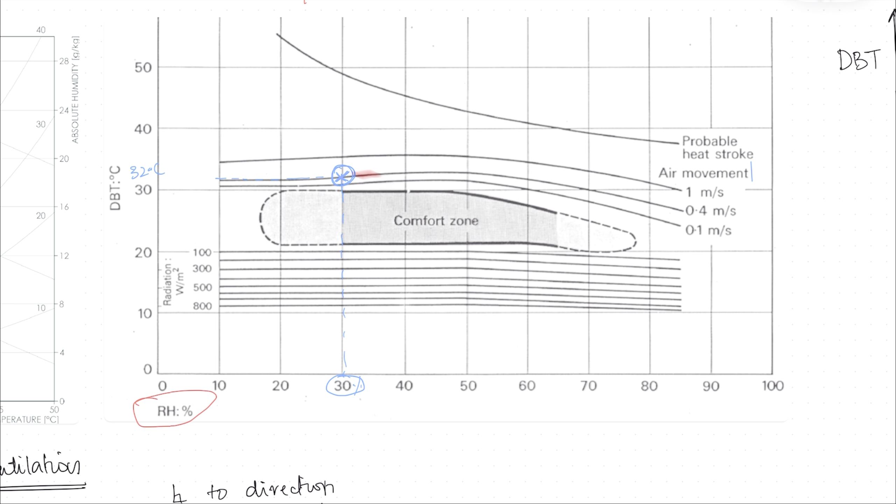Let's go through it again. So we have a relative humidity of 30% and a temperature of 32 degrees Celsius. We mark the point here, and it marks right on this corner. What you do is follow this line and see what it reads here. It says 0.4 meter per second. So what does that mean? If you provide an air movement of 0.4 meter per second, then you can bring whatever environment you have created in your building, which is not in the comfort zone, into the comfort zone by providing 0.4 meter per second air movement.

Now let us consider another example. Let's consider a relative humidity of 50% and a temperature of say 15 degrees Celsius. That brings us to somewhere here. So you follow this line and see somewhere between 500 and 300, let's say this is 400. What does this mean? If you provide radiation of 400 watts per meter square, then you can bring the environment of your building into the comfort zone. So this is how bioclimatic charts are used.

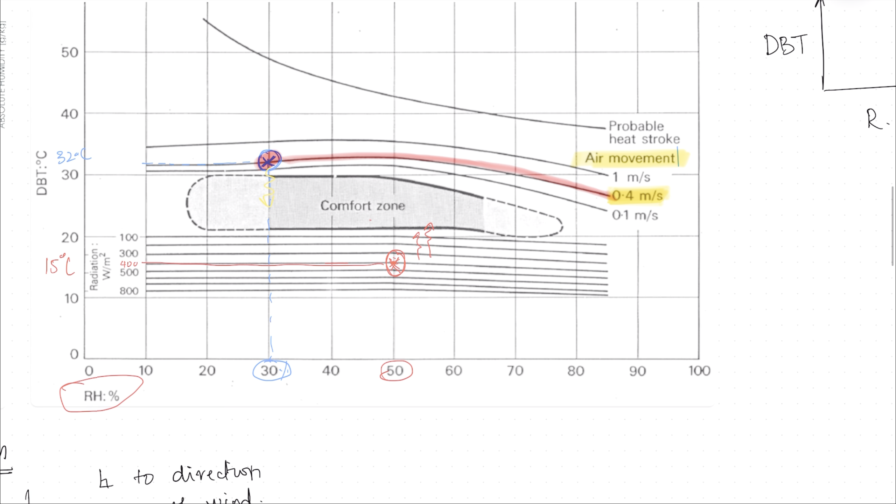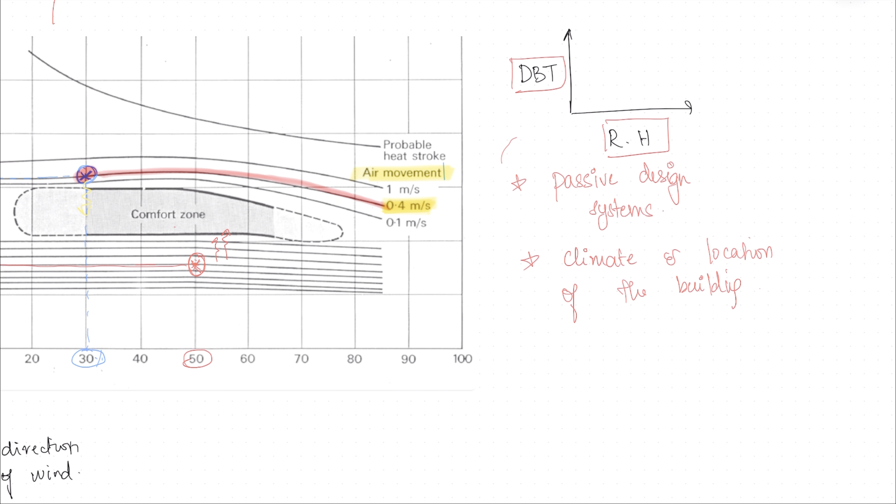It is basically used for designing passive design systems, uses relative humidity and dry bulb temperature as its axes, and this is based upon the climate and location of the building, and it's basically used in the early planning stages. So I hope bioclimatic chart is clear.